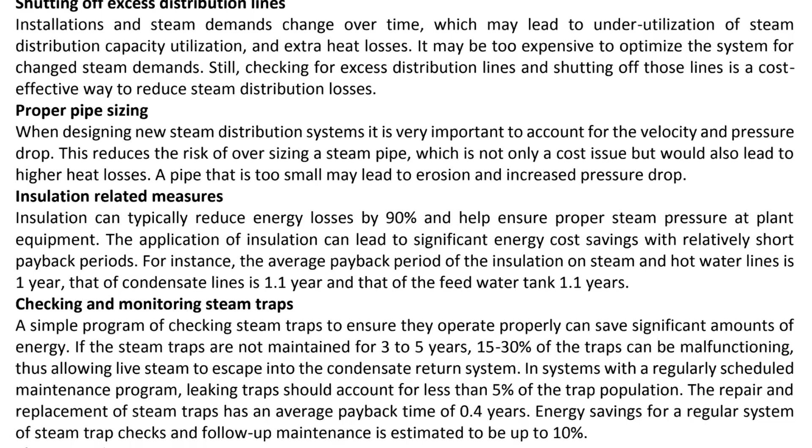Next is the proper pipe sizing. So here we would like to emphasize that if the steam requirement is more, then we can use bigger size pipes for steam. Otherwise, it is recommended to have the small size of the pipe. So what are the advantages of the small pipe?

If the pipe is small and the steam is projected, especially in thermal power plants, it is falling on the blades of the turbines and giving large kinetic energy. But if the pipe size is more, then for the same pressure, the velocity or the kinetic energy which is imparted is less.

But if the pipe size is too small, then it sometimes may not sustain the pressure and may burst. And also it may lead to erosion because of the chemical depositions, or corrosion if it is metallic pipes, iron pipes, etc. So that is to be taken care of.

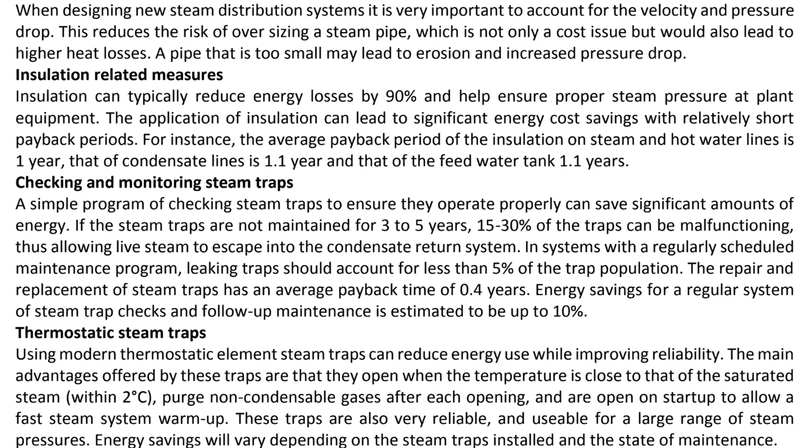Next is the insulation related measures. So this is the big problem which is associated with the steam losses, that if the temperature or the energy which is associated with the steam is not passed on, then it means that it is being lost to the surroundings or to the vicinity of those areas, which is undesired.

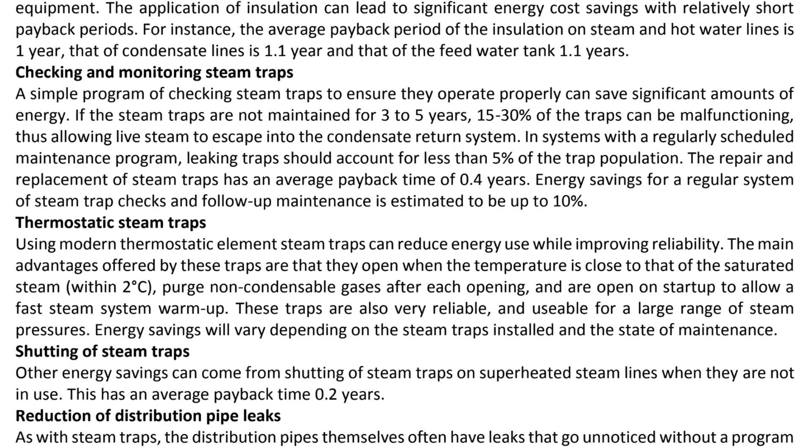For example, if the steam in thermal power plants is falling on the blades, then it is fine. But if it is lost to the surroundings due to insulation failure, then it is a loss. So that is to be taken care of. And for hot water lines, steam lines and condensate lines, it has a payback period of approximately 1 year each. So it is good to invest in this because these insulation energy losses or thermal losses amount to 90%. So it is a big portion.

Next is checking and monitoring the steam traps. First of all, we should know what a steam trap is. It is the device which is used to discharge the condensate and the non-condensable gases. So both discharge of condensates, which may be semi-solid or semi-liquid, you can say, and also these non-condensable gases. You can say that these are unwanted as far as steam is concerned, so they should be discharged regularly.

For that to happen, the steam trap should be of good quality, and if it is not maintained properly, then it may lead to 15 to 30% of malfunctioning or losses. So its repair and replacement should be done because it has good energy saving, and the payback time is also less, 0.4 years. That is good. Thermostatic steam traps: this is the modern thermostatic element which is associated with these steam traps.

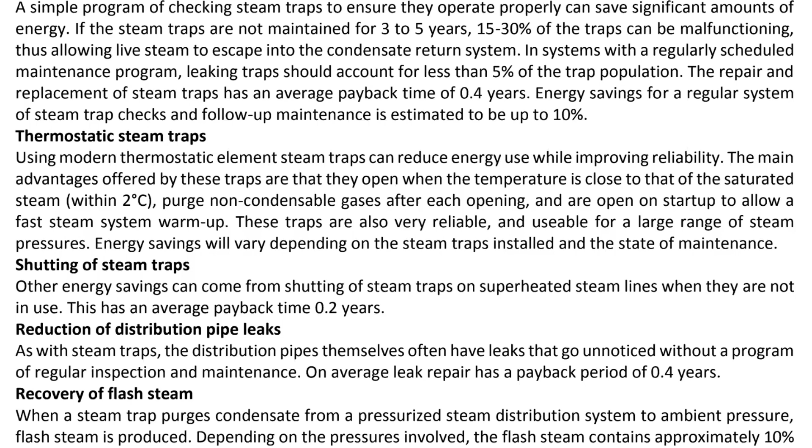Next is shutting off steam traps. If the steam traps are shut when they are not required or not in use, then it again helps in saving energy, and it has a payback period of 0.2 years. Next is the reduction of distribution pipe leaks. So pipe leaks should be monitored very often.

Because if any steam is being leaked, how is it different from the insulation? In the insulation, there will be heat loss, but there will be no loss of the steam directly. Those thermal losses will be due to Newton's law of cooling. But if the steam is directly leaked due to any hole or leak, then it is a problem for us. So that is to be checked.

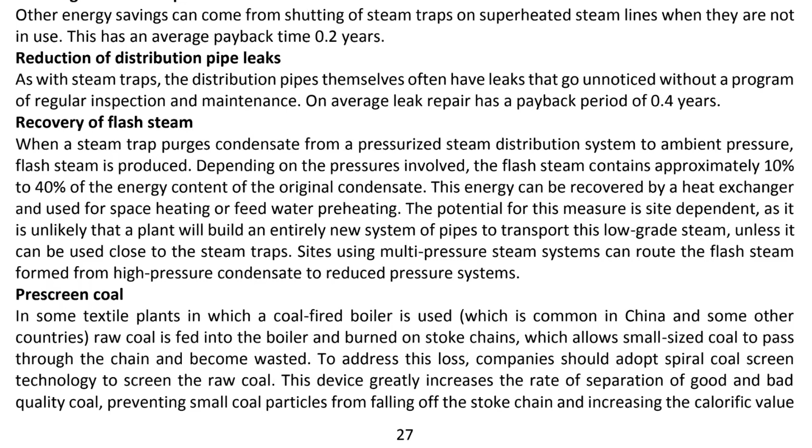Next is the recovery of flash steam. When a steam trap purges condensate from the pressurized steam distribution to ambient pressure, flash steam is produced, and it contains 10 to 40% of the energy content. So this is also very good. Heat exchangers are used to trap this heat, and it can be used for space heating or feed water preheating.

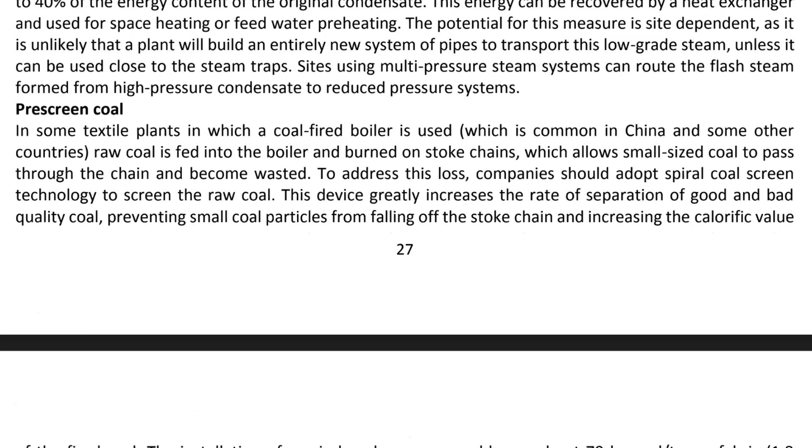It can be used to raise the temperature of the water, which is later boiled or used for producing the steam. Next is the pre-screened coal. So what is this pre-screened coal?

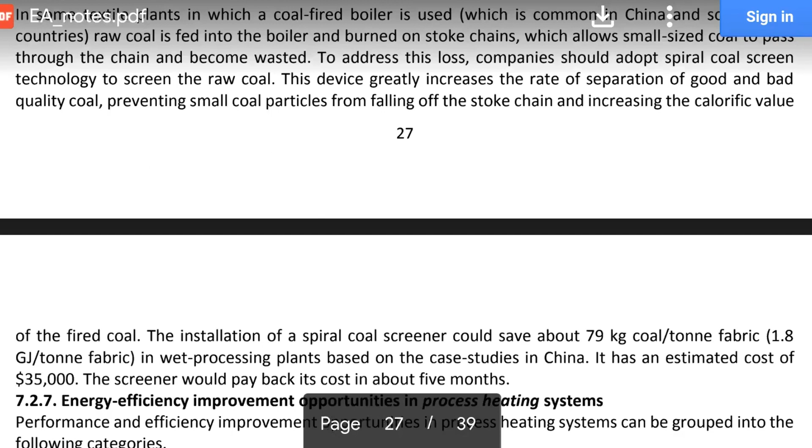In some textile plants, especially in China and a few other countries, coal-fired boilers are used, and they use the stoker chain, which results in leakage, or you can say that small-size coal passes through without going through the combustion process. So it is waste. To avoid this, spiral coal screen technology is used so that these coals are not lost. If this technology is used, it has a payback period of about 5 months. So this is all about the steam system.

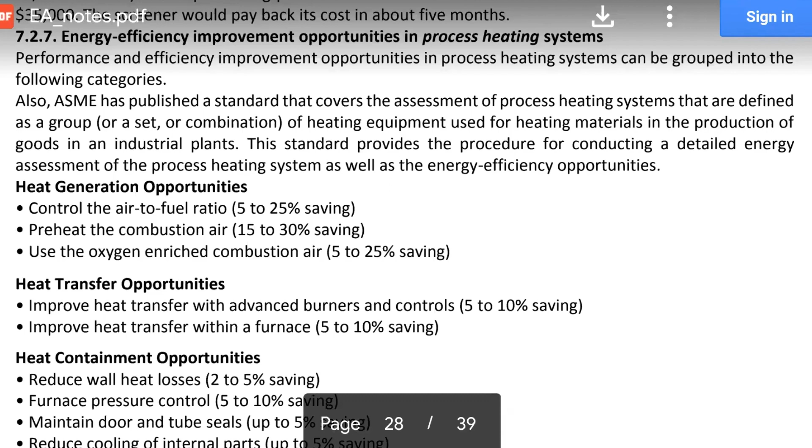Now, energy efficiency improvement opportunities in the process heating system. ASME, the American body, has done some assessment for process heating. Process heating systems are defined as a set or combination of heating equipment used for heating materials in the production of goods in industrial plants. Whenever goods are produced in industrial plants, melting or rolling processes may require heat. The equipment used for heating, in the rubber or steel manufacturing industries, which require a lot of heat, can be used.

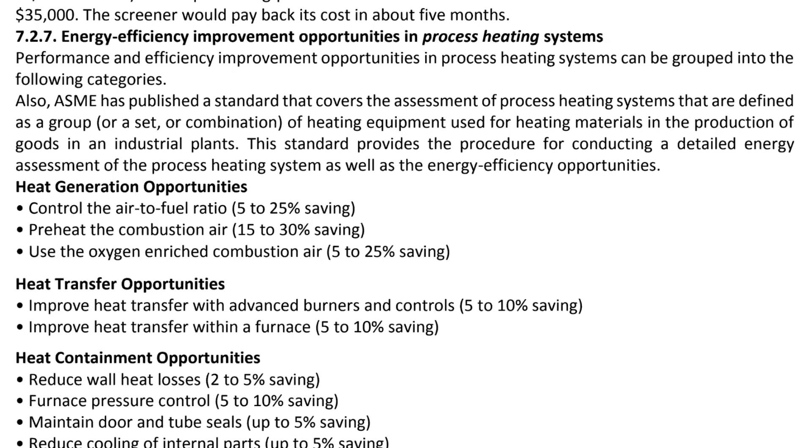Here the energy efficiency opportunities come under a few categories. For example, heat generation opportunities by controlling the air to fuel ratio. Next is preheating the combustion air. It is well known that air is helpful in combustion, but if the temperature of the air is above ambient, it will assist more. And if the oxygen content in the air is more, it will add more to the combustion. Next is heat transfer opportunities. Heat transfer will be more with good, advanced burners with a control system.

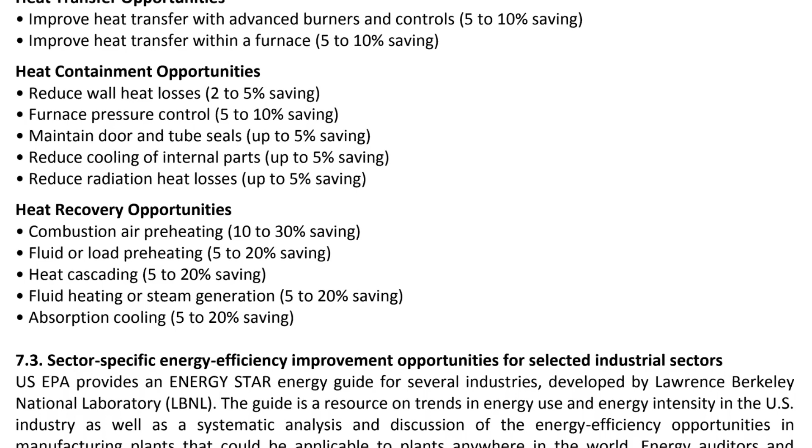Next is heat containment opportunities. As we discussed in the previous topic, there is a big problem of insulation: a lot of heat gets lost, according to Newton's law of cooling, from the walls or the pipes. So the boilers should be such that this is minimum. As we discussed with sooting, a layer of carbon black is deposited, which can be removed using mechanical and chemical processes.

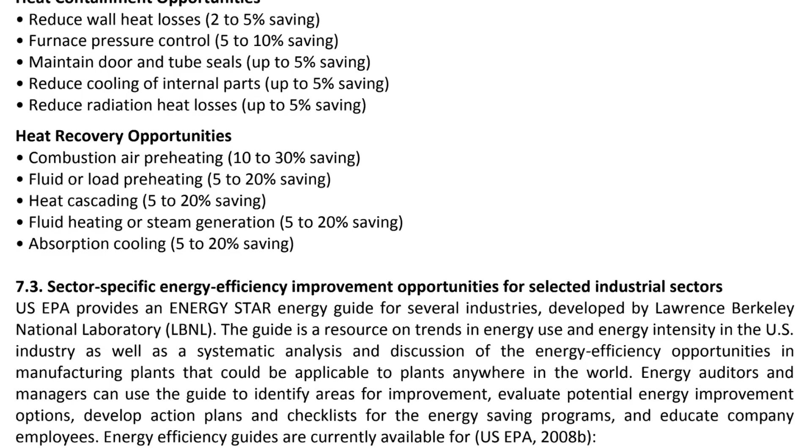Next, pressure control also helps, and maintaining the door and tube seals, as discussed for the fan system and the steam system. Whenever there are more joints, there is more possibility of leakage, whether it is the pressure, fan, water, or steam system. So that is to be safeguarded. Next is reducing the cooling of internal parts and reducing radiation heat losses, as heat losses can be through conduction, convection, and radiation. So all are to be safeguarded.

After the heating is done, there should also be heat recovery opportunities, like combustion air preheating. When the required steam is produced, the system does not shut down or cool down automatically. It takes time. So ideally, we should adopt technologies or methods to trap that heat before the system cools down. That trapping can be through the hot air system, steam system, hot water system, condensate system, or flue gases going out to the atmosphere. Before they go to the atmosphere, we should trap their heat so it can be used for space heating or preheating the water. These are the heat recovery opportunities, so they should be taken care of.

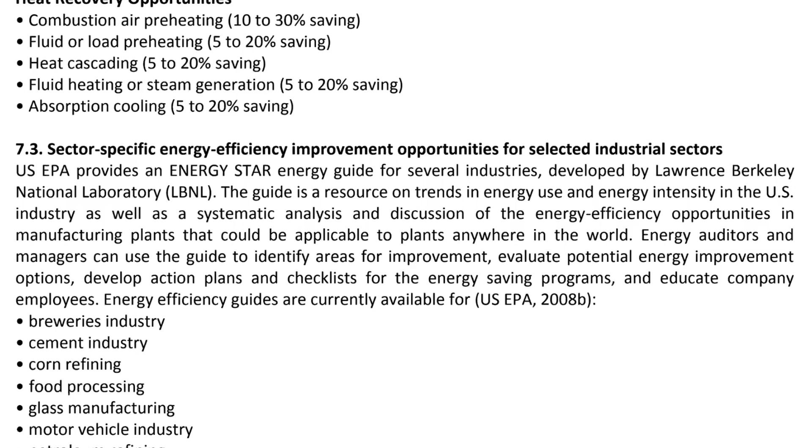Next is specific energy efficiency opportunities in selected industrial sectors. Energy guides for different industries are provided by different countries. Industries for which Energy Star guidelines exist include breweries, cement, food processing, glass, motor vehicles, petroleum refining, etc. Using these energy efficiency improvement opportunities in different industrial sectors, the best available techniques are chalked out so that the best practices are carried out for the best results, and for that the BAT reference, or BREF, document is referred.